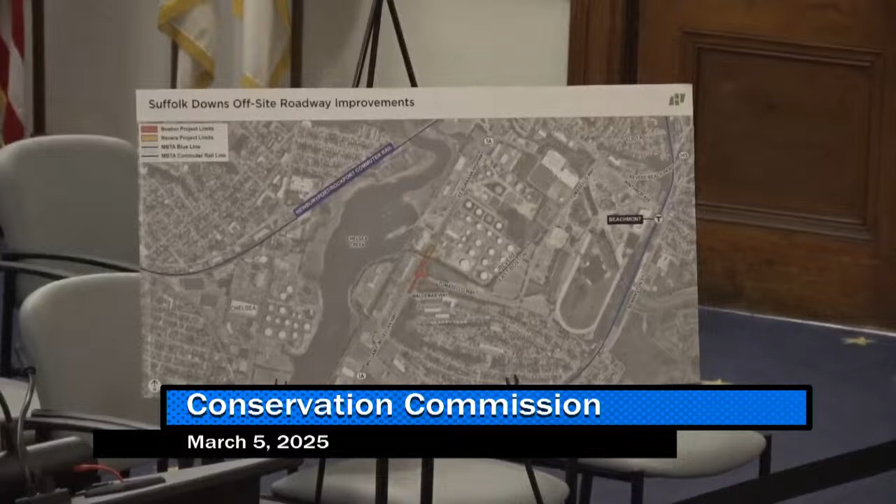Good evening, Rick Latini, civil engineer with Howard Stein Hudson, and I'm joined tonight with Abby Middleton. She's representing the applicant, the McClellan Highway Development Company. As you can see, this is a transportation improvement project. It's related to the master plan redevelopment of Suffolk Downs, which you can see on the right side of this board. Our improvements are located off the southwesterly portion of the site. The area that's in red, the hash in red, that's in the city of Boston, and the portion that's in the city of Revere is in orange.

So these are basically minor activities within Route 1A, which is a state highway that's owned and maintained by Mass DOT. The purpose is to improve vehicle and pedestrian safety as well as accessibility out there. The work remains within the footprints of the existing sidewalks in the roadways. And of course, we'll have proper erosion and sediment control, such as compost filter tubes and catch basin filters such as silt sack.

So just to go over, I'll go through the project quickly, hopefully within 5 minutes. Route 1A is an urban principal arterial, has 2 lanes of traffic in each direction, sidewalk on each side. Today, Tomasello Way is not signalized. However, you can take a U-turn at Tomasello Way northbound to go back in the southbound direction, and you can also take a left turn southbound going into Tomasello Way. So I'll zoom into our intersection.

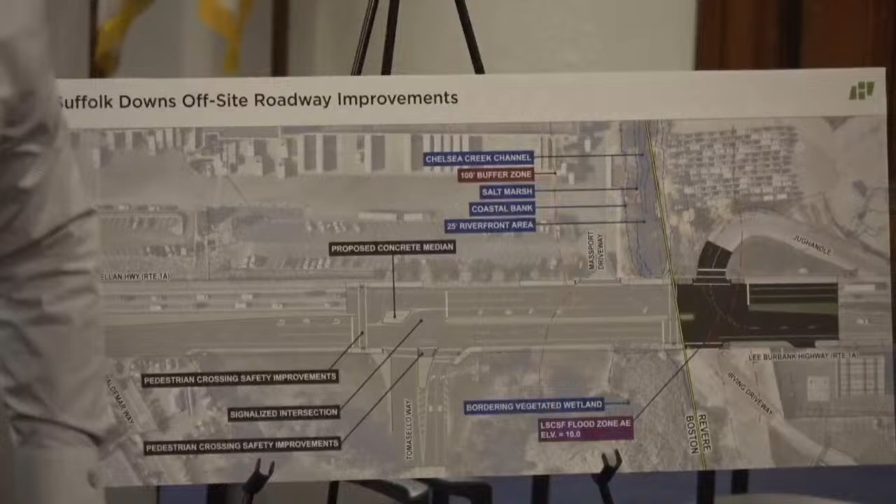Let's go over the improvements really quickly. We are modifying this existing traffic island a little bit to provide a better queue for that U-turn, as well as make this lane, it's 9 feet now, we're going to make it 11 feet. We're also adding this cement concrete median here in the middle. That, first of all, it separates that U-turn and the left turn traffic. We're also putting a new traffic signal in there.

This island here has a widening near what's called the jug handle, and we're eliminating that widening so we can have a consistent median width, and what that does, it allows us to extend that left turn queue into Tomasello Way. Since we're adding signals here which don't exist, they will have a pedestrian phase, so we'll be able to add a crossing across Route 1A, which doesn't exist near this area now.

We're also reconstructing the end of our Tomasello Way. We're narrowing it a little bit here, which you can see by this green hatch. Reconstructing this island here, kind of give it a curve to the right because it's a right turn only out of Tomasello Way, so that'll further reinforce that motion. We are reconstructing the driveway here. It's called the Massport driveway, but it's actually the northerly entry into 480 McClellan Highway.

So all this actually is within the city of Boston. The work in Revere is mostly around the jug handle, which, if you guys know, is a place where you can turn around from the southbound to go back to the northbound direction. That's the primary purpose of it. That is signalized today, but we are going to replace all the signals with new signals. And similarly, we're adding a pedestrian crossing at Route 1A, so that'll be a few more pedestrian signals we're adding.

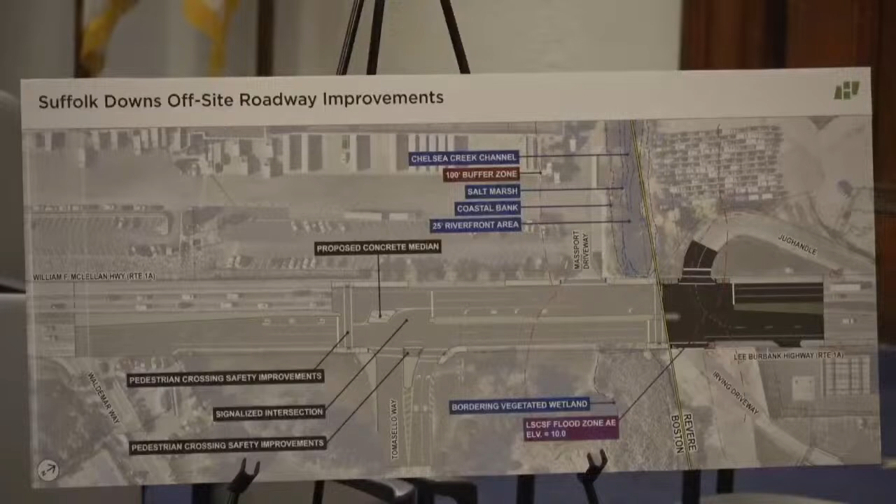Thank you very much. One question from the site walk: there was a bridged area just before the Revere side. What kind of sediment or erosion controls are you going to implement there, since it's on the Boston side but drains downriver to us? Yes, there's a pretty big culvert there and a drop-off, and there's a wall that actually protects sediment from going over.

We'd probably put compost filter tubes tied right up against the guardrail. The guardrail actually has a little lip above the sidewalk, so it's almost double protection. Even once we get off the bridge, we'd still try to keep the compost filter tube up against that guardrail.

Even past the bridge, once you get onto the Revere side, there's opportunity for sediment to get into that area, and on the other side where the jug handle exits, the same situation is happening. So I just want to make sure your erosion controls are robust in those areas.

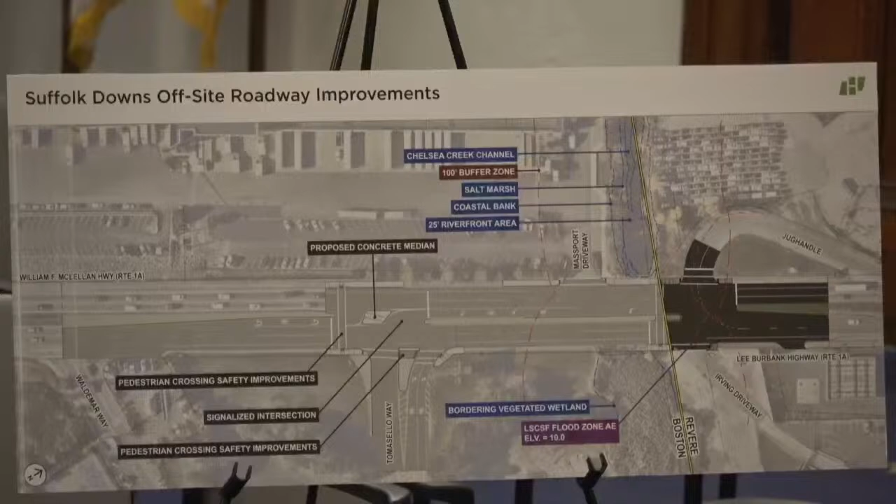Like I said, we're proposing 12-inch compost filter tubes, just because it's sidewalk work, so there won't be a lot of disturbance. Okay.

At this time I want to open it up to the other commissioners if they have questions about the project. Are you just milling and overlaying?

Sorry, I forgot to mention, once we're done putting in the traffic signal conduits and such, we will be milling and overlaying on the northbound side from Tomasello Way all the way to the end of the project, just past the jug handle. On the northbound side here, we'll also mill and overlay from here to just past Tomasello Way, so there are a couple of areas of mill and overlay, yes.

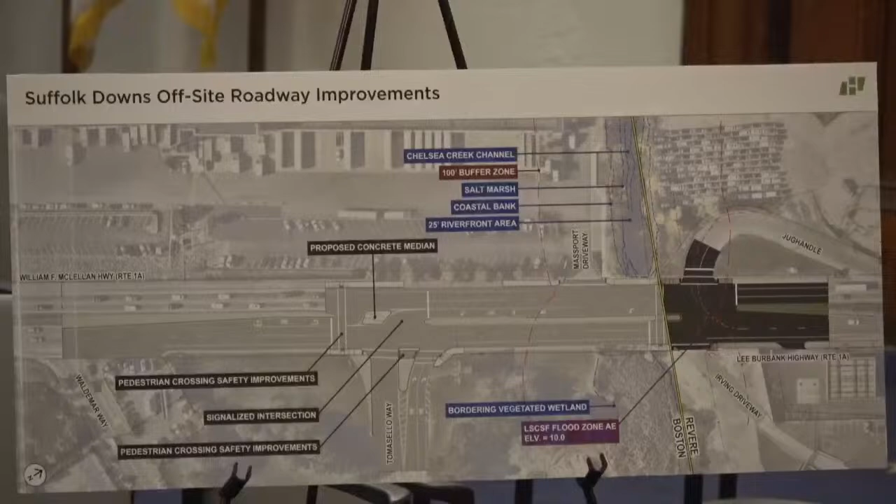Any other questions? At this time I'd like to open it up to any opponents of the proposed project. None. And any proponents—you don't count, but...

So, seeing as how you will be managing the sedimentation that could develop from this, you're not changing grade, and it would be a minimal impact to reconfigure the lanes in this situation, and enhancing the traffic patterns will also help alleviate some of the road damage occurring in that area that affects our protected areas.

At this time I would like to call for approval of the notice of intent for this work. I'll make a motion to approve the NOI for this work. Second? Second. All in favor? Aye, aye, aye. Excellent, thank you very much for your time.

Okay, next up is a notice of intent, DEP file 0610833. This is Revere Mass Owner LLC, 277 Park Avenue, 45th floor. This is for Lee Burbank Highway, proposed construction of a 77,000 square foot technology warehousing development with some office space as well.

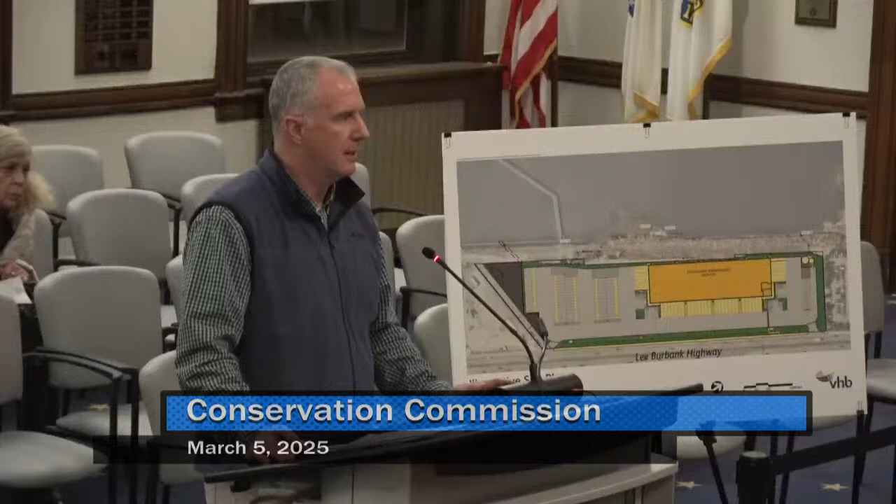So we're here tonight with the follow-up on the development of the proposed site. The site consists of a 9.9 acre site along Chelsea Creek, which is in the rear. There's a proposed warehouse building, and there's an existing warehouse building and fueling station that was demoed or is in the process of being demoed and previously approved. There's really no natural buffers between the wetland resource areas and the existing site.

It's either building, pavement, or compacted gravel. The proposed project consists of a 77,600 square foot technology warehouse, loading dock, parking, utility improvements, and stormwater system.

There'll be some significant stormwater improvements. There's an existing discharge pipe that takes water from the project area, the existing site, and directs discharge here. The proposed project will include deep sump catch basins, a water quality unit, and a subsurface sand filter prior to any discharge to the creek.

So a substantial improvement. There are some wetland impacts associated with this project. The vast majority of the project is within land subject to coastal storm flowage, so we've got 429,100 square feet of impact to land subject to coastal storm flowage. That's associated with the project site.

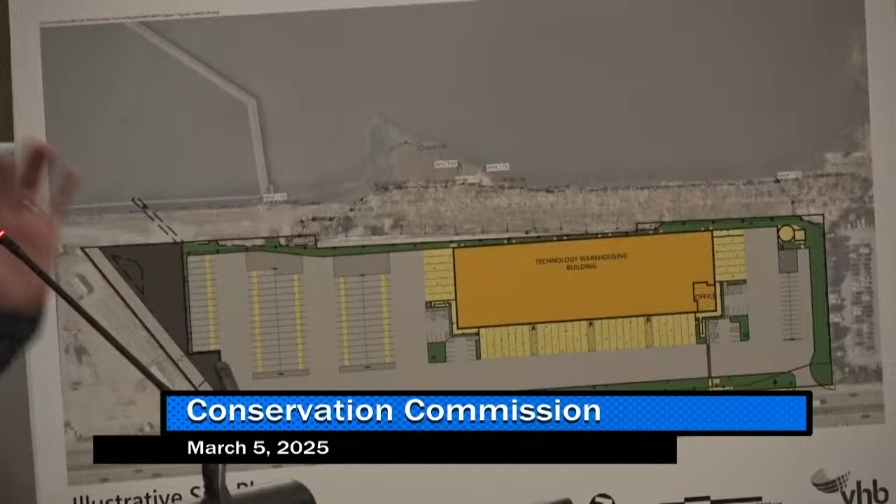The other thing I wanted to mention is that based upon this, we're actually proposing 1.6 acres of added landscape and approximately 100 new trees. So there'll be some substantial improvements as far as landscape and trees and such.

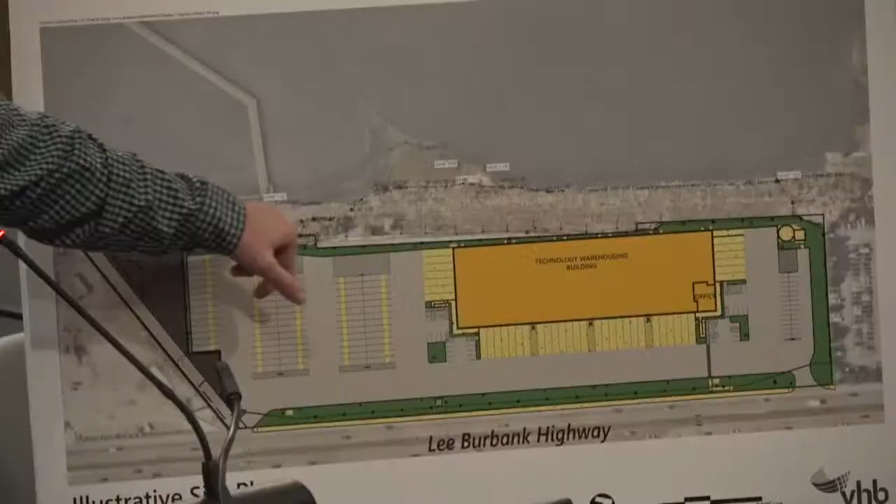I had another question. Is there still a railroad spur in the back? Yes. Are you removing that? No, there's a railroad spur that cuts across in the back. The only place that would be impacted is associated with the stormwater discharge where it crosses those existing tracks. Have you been permitted by the MBTA with that yet, or no? Yeah, one correction—I believe, correct me if I'm wrong—the spur behind the building will be removed.

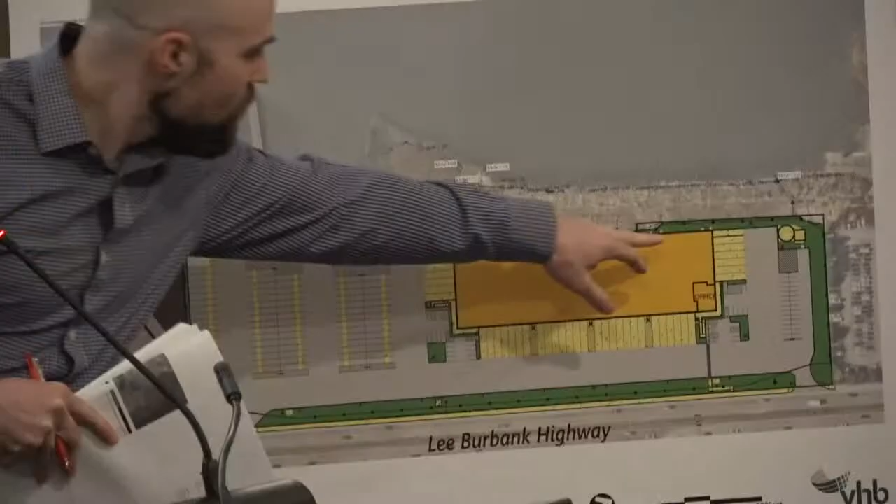For the record, Dan Ketches with VHB. So there is a small railroad portion back here, behind and right adjacent to the existing warehouse building on the project site, and a portion of that will be removed. We are in process with MBTA for the license. Good luck. Good luck.

Any other questions? Just with an area with that much frontage to everything, one of the things I think about is whether in your lease for a new tenant—if someone's already signed, or if you have a lease agreement in place—you make sure that they will upkeep the area, because it's very easy for people to throw stuff out and it ends up in places, and 20 years later it looks like a pit. So just make sure, as this obviously is beautifying the area, compared to what it was before.

I just want to make sure that it's going to be upkept, whether it's through you or the lease of whoever's coming next. Yeah, just to be clear, I'm the wetland scientist on the project with VHB. We'll alert the property owner and applicant regarding that. I'm sure he's going to invest substantial amounts of money in a new building, and the last thing he wants is debris and other people dumping material on his site. So I'm sure it'll be kept up, but I'll express that concern to him.

I definitely can echo that a little bit. It's so close to such a degraded resource that having that maintained would definitely be something I would be putting as a special condition so that it would be maintained as such.

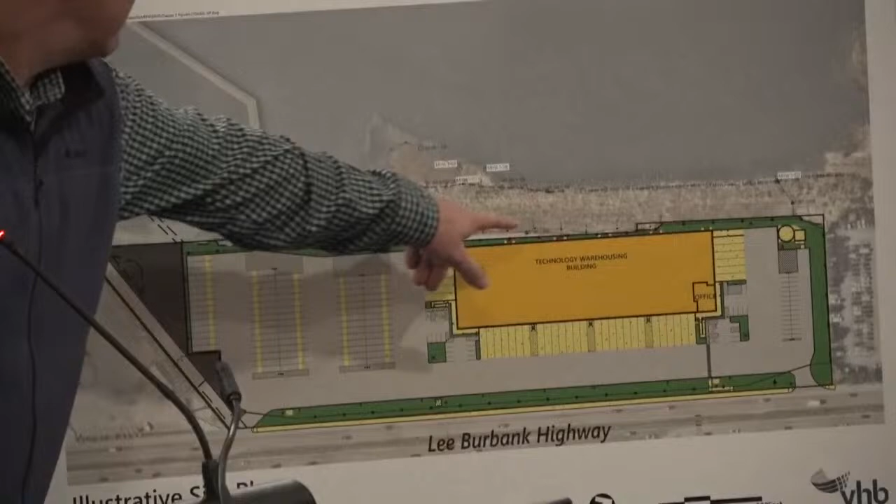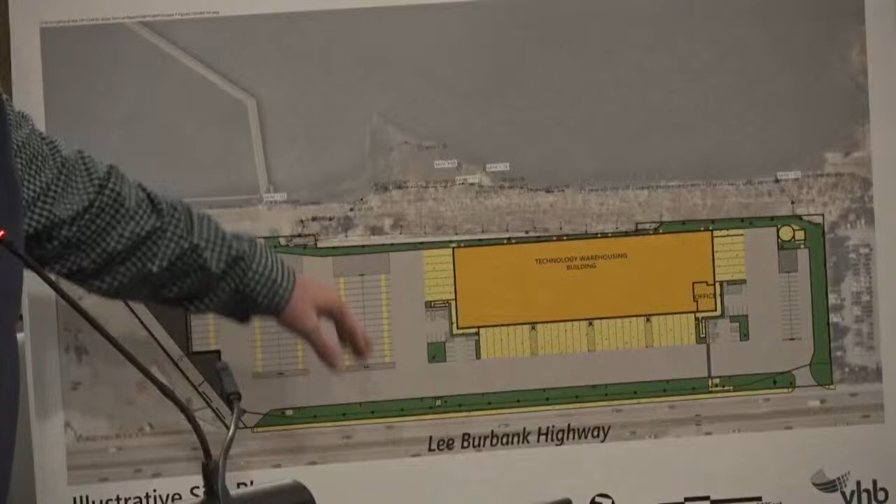And what kind of plantings were you thinking of putting in that area? Would you be enhancing it with native plantings, or is it mostly going to be grass? Behind the building, if I remember correctly, it's mostly grass. Most of the landscape plantings and trees are kind of in the front and along the sides. Okay, because it's really kind of a narrow swath, they'll have to maintain it since it's right up against the back of the building. So probably periodic mowing there.

I would definitely want to see what you'd be using for plantings on the property, and make sure it's compatible with our existing area here. If we're going to try and beautify and make it better, let's make it better all the way.

Yep, there's a detailed landscape plan that was provided as part of the materials. I saw that it was going to be primarily grass, but I didn't see what kind of trees were on it. I must have missed it. I apologize, I don't recall the specific trees.

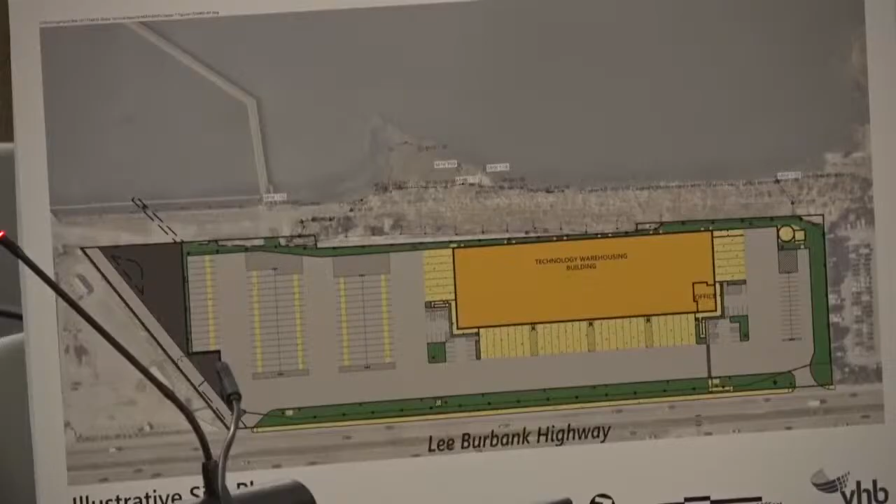Any other questions? Just an administrative comment: the order of conditions for demo and then for construction for each of these lots has been a lot of work for us, a lot of site walks, confirming things are in place. So for future reference, I understand the schedule, but this building's still standing right now, so we didn't really need to do it, just for VHB's knowledge. Understood. I drive by that site often, and I know some of the piping has been removed, but the building's still up and it's got a long way to go.

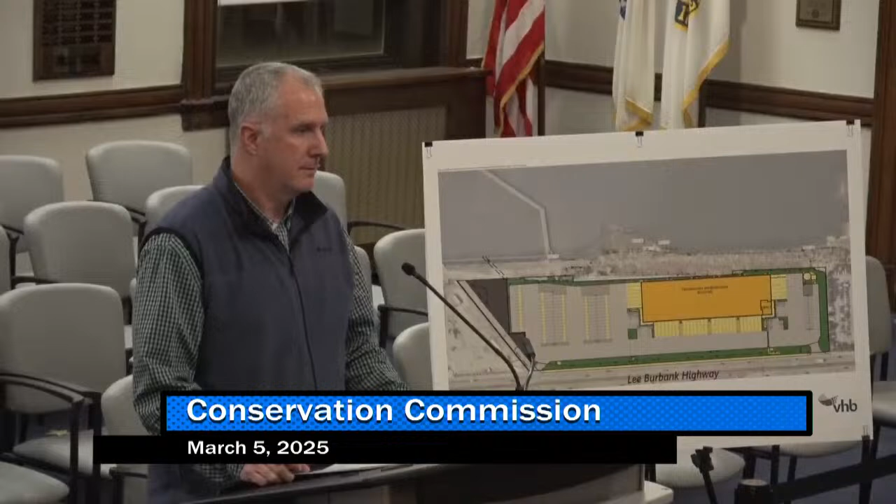Seeing how it will be an enhancement, and definitely getting any of the oil things out of that area is an enhancement in my humble opinion, I would like to put it to the commission to approve this project here, this notice of intent. I would make a motion to approve the NOI. Second. All in favor? Aye.

That was a little reverb there. All right, well, thank you very much. Thank you, I appreciate it. All right.

You're welcome. All right, next up we have a request for determination of applicability, and this is the commuter train right-of-way, MBTA vegetation management plan.

Now before we get started, I know certain certifications and things need to be held in order to go out and inspect these areas and work in them. None of us hold those credentials, and it would be very difficult to manage us getting out there to actually see the site. So if you can give us a little more insight as to what you are doing for this RDA, I would appreciate that.

No, yep, there you are. And if you could state your name. Yes, hello everyone, I'm Matt Donovan. I'm from Benish, here to represent Keolis for this RDA.

Confirm the accuracy of the maps used for herbicide application along the commuter rail right-of-way.

We submit this RDA to your commission every 5 years, required by 333 CMR 11, and it's required to get these determinations before submitting the 5-year vegetation management plan to Mass Department of Agricultural Resources. The vegetation management plan is designed to manage and control vegetation necessary to keep the railroad and operations safe, and regulations are in place to keep sensitive areas protected throughout the duration of the plan.

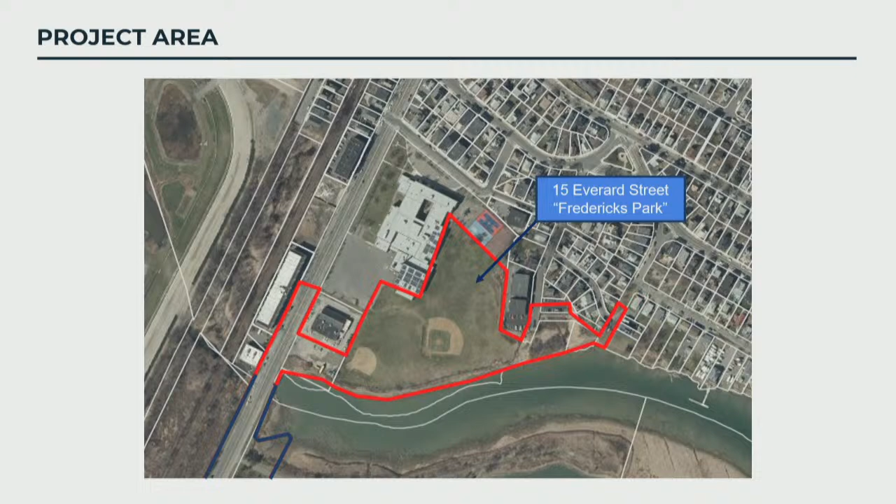The proposed work in the notice of intent includes geotechnical investigations. I do want to correct that in the notice of intent we called out 6 borings, but there are actually 7 proposed.

They're marked with an A on the plan set, so we have boring 110 and 110A. So we're not proposing 14 borings, we're only proposing 7, but we did want to present these alternate locations to you up front, just in case field conditions dictate different locations than initially proposed.

As part of the NOI, we are also requesting confirmation of resource area boundaries in the area, and this is just to help with permitting later on as the project progresses into later phases. We've already had the resource areas ironed out with the commission, and it'll help streamline permitting efforts, hopefully.

In this area, we have Inland Bank associated with Sales Creek, on the left-hand side of the screen, west of Bennington Street near the pump station. Then there's associated riverfront area with Sales Creek. Because Sales Creek goes through the tide gate into the Belle Isle Inlet, the riverfront area cuts off there, and we've provided explanation in the narrative of how we came to that determination.

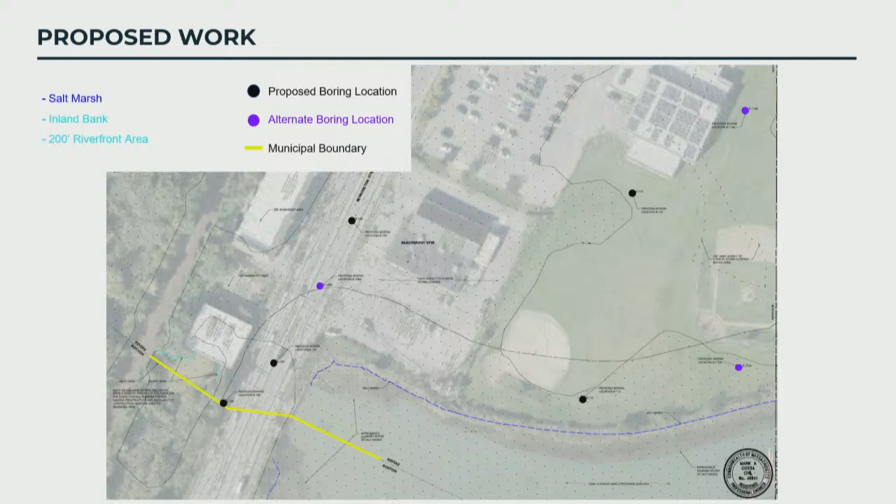We also have land subject to coastal storm flowage, which is this dotted hatch. Under local jurisdiction, there is the 100-foot buffer zone to land subject to coastal storm flowage, shown in the black dashed areas. So these are the first set of borings.

I believe those are all the resource areas I wanted to call out for your attention. With the bordering vegetated wetland here, the salt marsh that we're showing per the definition in the Wetlands Protection Act regulations, salt marsh extends to the high tide line. In this area, the high tide line has been determined to be 6.82 feet NAVD 88.

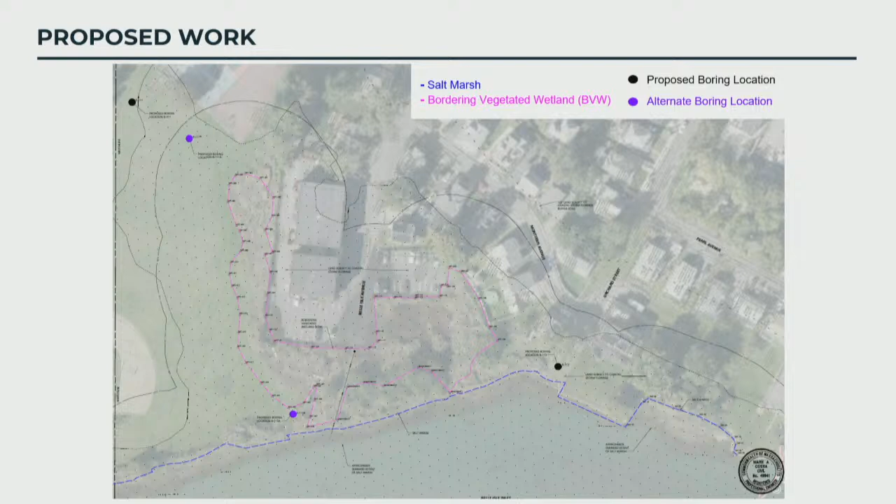So that is where the extent of salt marsh stops. We were able to determine through surveyed elevations that there's actually a berm that separates the salt marsh in this area to the south of the apartment complex, and then where that wetland feature starts on the north side. That's how we came to the determination of whether it was salt marsh extending up into that area, or if it is jurisdictional as bordering vegetated wetland.

So these are just zoomed in versions of the plan, so I'm happy to go back to these slides if we would like to discuss anything else. But again, seeking confirmation of these resource area boundaries as depicted.

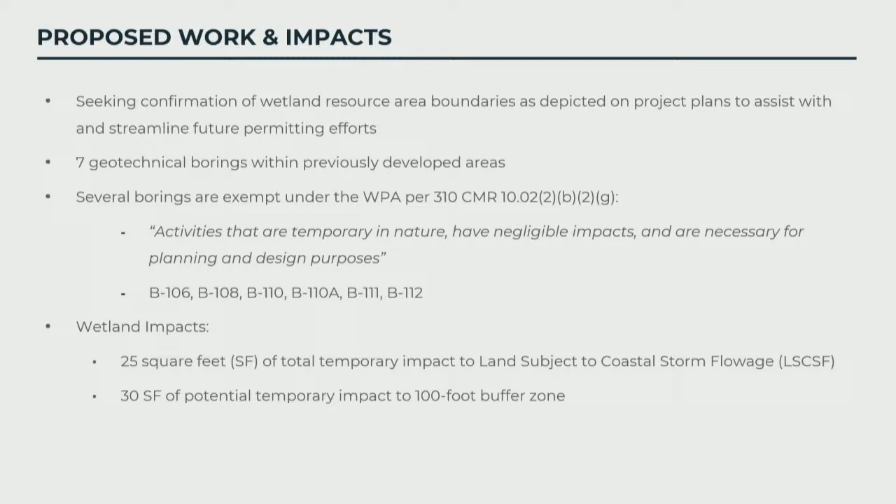It's for 7 geotechnical borings within previously developed areas, several of which are exempt under the Wetlands Protection Act. We're conservatively estimating 25 square feet of temporary impact to land subject to coastal storm flowage for these borings, and 30 square feet of potential temporary impact to the 100-foot buffer zones. So there's no permanent impacts associated with the borings.

Any temporary impacts will be mitigated, and they're in previously disturbed areas. Erosion controls will be installed, and areas will be backfilled and restored after completion of work. That's what we have for you today, but happy to answer any questions.

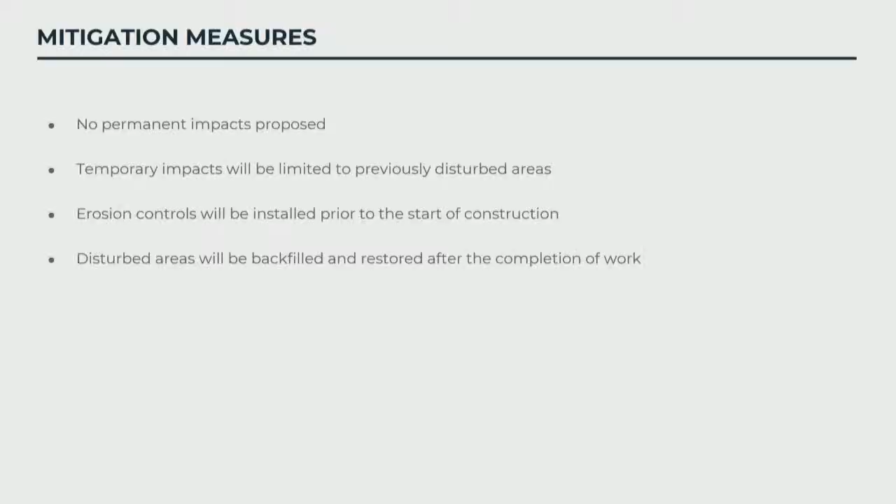I know we will be expecting another hearing with you. Yes, so we do have a site walk down to confirm the resource area scheduled for March 24th. It's already been set up.

The only question I guess I have is, how large is the boring equipment that you're going to be using? There are some areas where you get very close to even that bermed area. So what are your plans? How large is the equipment? What kind of lay down stuff are you using? Are you going to be putting down plywood or something like that to mitigate the impacts as you get closer to those areas?

The ones in the middle of the field are a little easier to mitigate than the ones that get close. Yeah, so I don't want to speak to contractor means and methods because we don't have those specifics from them yet. But the borings are really only conservatively estimated at 5 square feet per boring, so they are relatively small. I think we'd be happy to work with the commission if there were sensitive areas you would like to see. We could try to work—I don't want to speak again for the contractor—but we're very conscious that we don't want to be disturbing the resource areas any more than we need to.

Knowing that the site does get very wet, if needed, we would aim for a dry day and hopefully a stretch of dry days so that it's not too swampy out there, but we would use matting if needed. Elle, I don't know if you want to add anything.